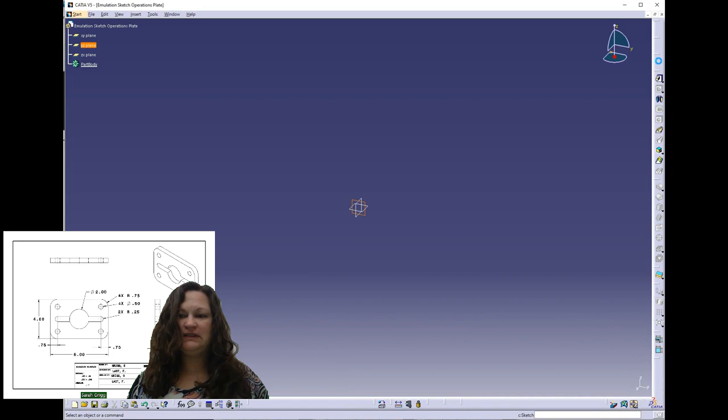Now let's complete an emulation using sketch operations. So the first thing I'm going to do is make sure that I'm in the correct unit system. So I do want to be in inches, so I'm going to go under Tools, Options, Parameters and Measures, and then Units to select inches from the drop-down list.

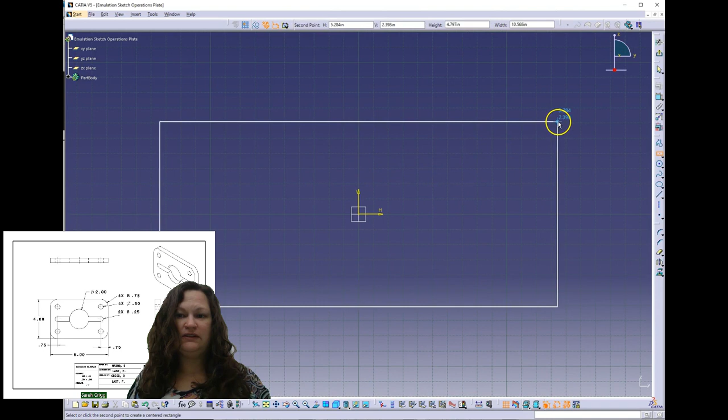Then I'm going to start my sketch with a center rectangle, aligning the center point of the rectangle at the origin to get those two locators, the horizontal and vertical locators, locked in. I'm going to do a rough sketch of the size and then set the constraints for the horizontal and vertical distance.

So it looks like I overshot the size a little bit. That's because the center rectangle is measuring the X and Y directions from the center. So you've got it in both directions. So make it a little bit smaller than my original sketch when it's resized.

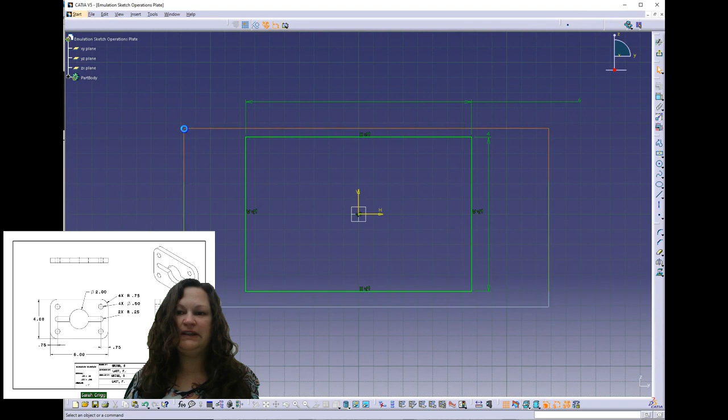So I'm going to select the entire thing, and this way when I apply the fillets, it'll apply to all four corners and it'll create equal constraints between all of them. So then when I make one edit, it will edit all four at the same time.

From there, I'm going to add the hole. So in this case, the holes are going to be concentric to the arcs. So I'm going to define one of the holes with the diameter and then mirror that hole to the other side. Then I'm going to select both holes and mirror it across the horizontal axis to make the third and fourth one.

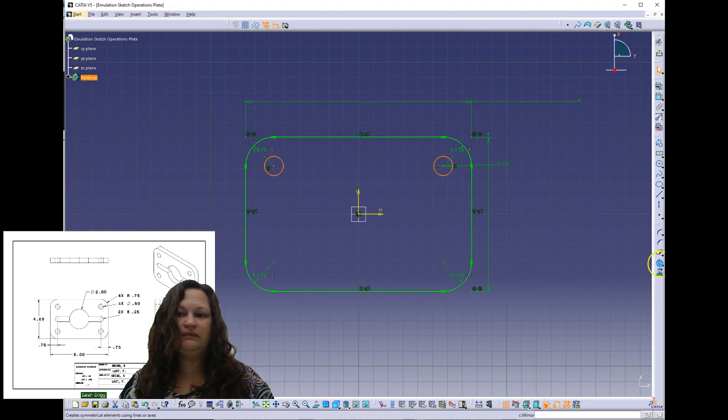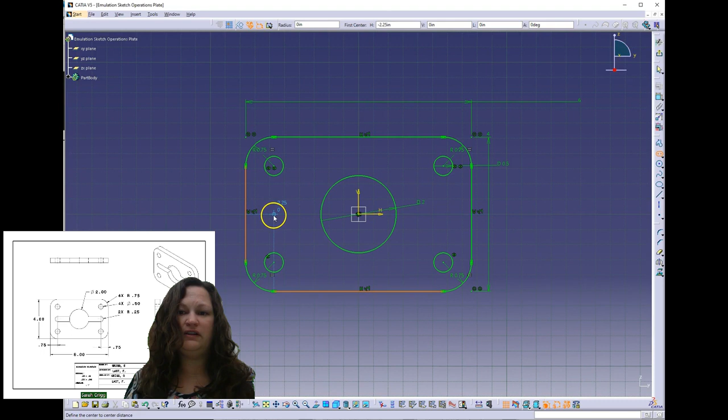Next, I'm going to add the large center hole and define it. And then place an elongated hole that's going to cross the center hole and land at the starting points that are in the same vertical lines as the holes are on the left and right side.

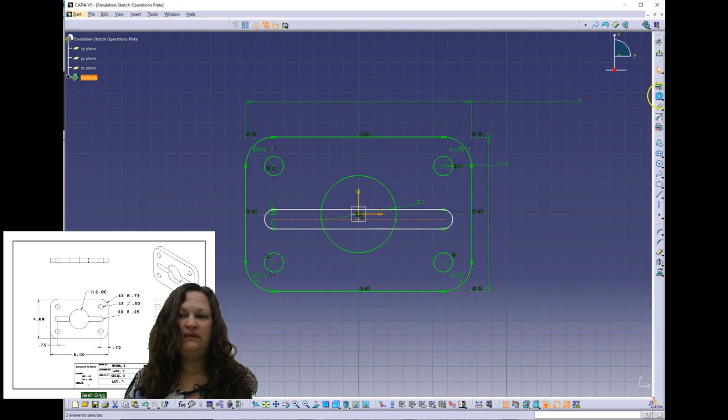So for these, I'll have to add the horizontal and vertical locators. So the first one, once I set my size, I'm going to set the center point to be coincident to the horizontal axis. And then the center points of each of those arcs to the outer boundary for the horizontal distance locators.

The next thing I need to do is use my relimitation tool. So I'm going to use the quick trim and I'm going to double click to activate and hold it active, and then go through and select all of those overlapping lines at the intersections between the circle and the elongated slot to make sure that that is one closed loop. And that completes the sketch of our front view of our plate.